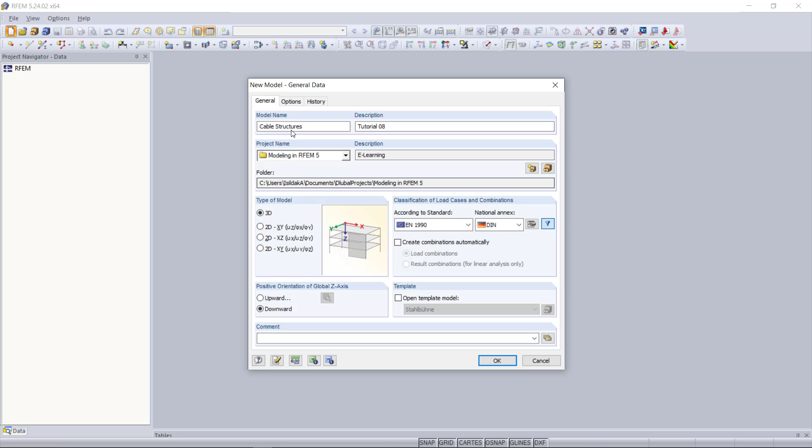So we can see here the dialog for the general data, and here we have to define a few more settings than usual. First, we will select instead of a 2D model, a 3D model. Then we have to activate RF-FORM-FINDING, which we can find under options, and then click on this checkbox here. Then we can close this dialog by clicking OK. Our example will be a mast with 4 cables. We will start with creating the mast.

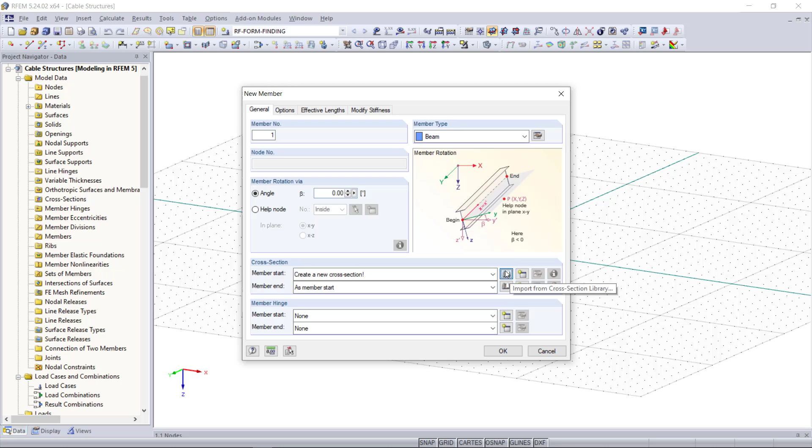For that, we will choose up here in the toolbar new member, and as cross-section we can set, let's say, a rolled cross-section, this one here. The material we can keep steel. Our mast will consist of 2 parts or 2 members. The first one will be 10 meters, and the second one will have a height of 8 meters, so in total we have a height of 18. For an easy way to create the member, we can change up here the work plane to the XZ plane. The first node of our first member will begin here in the origin, up to 10, then the second one with a length of 8 meters.

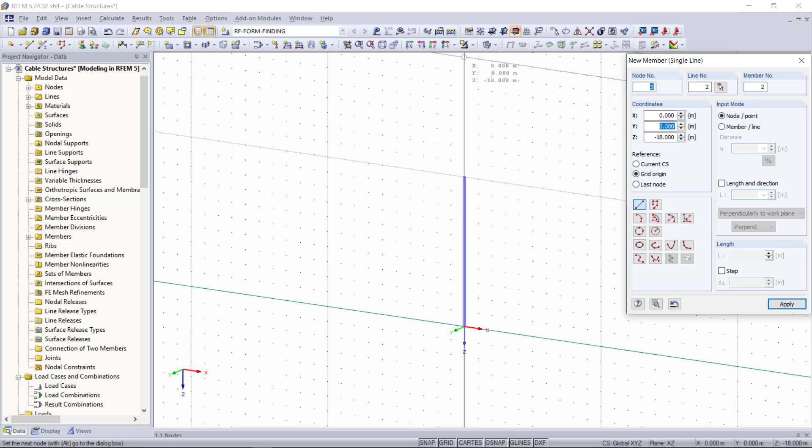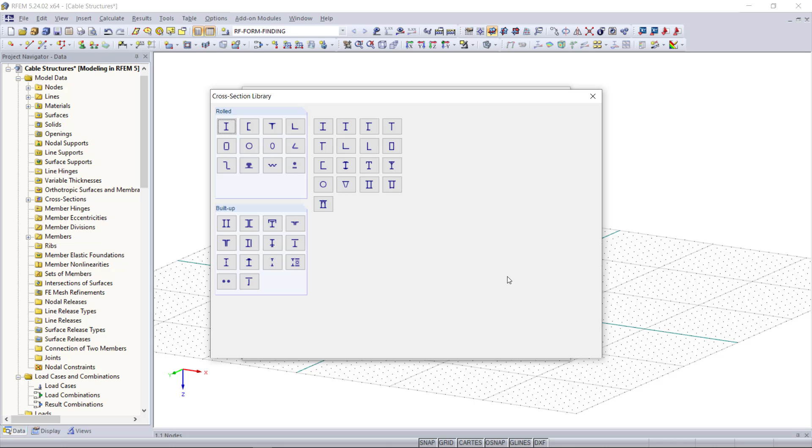Now we can switch back to the XY plane, and next we will create the cables. For that, we click here on new member again. And as mentioned in the beginning of this video, we will set the member type to a cable member. Then we can open up the cross-section library once again and choose a cross-section. We will choose a solid section, and under filters on the left side, we can choose a cross-section according to any standards. And we can also find, according to the cross-section type, cables. We will choose, for example, this one here, cable PE15. Now we can click OK through all of these dialogs.

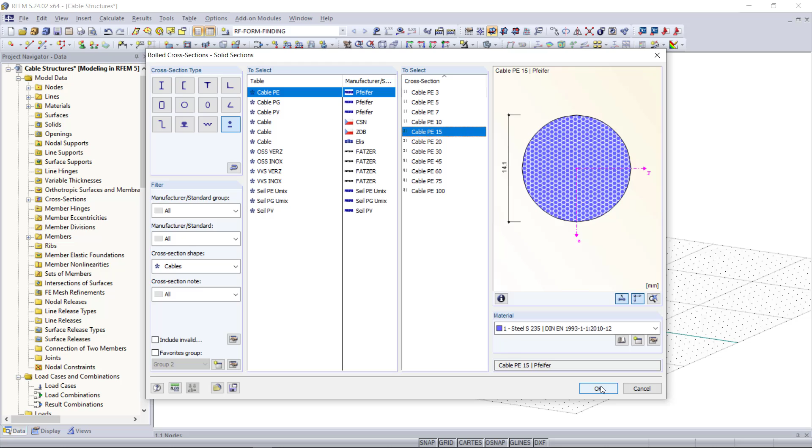We will place the first cable starting from the middle node down here to the point with the coordinates X 4.243, Y 4.243, and Z will be 0. We can quickly copy this cable 3 more times with the command up here called mirror. First around the XZ plane, and then these 2 around the YZ plane. Then we need also some supports, which will be hinged ones on each node.

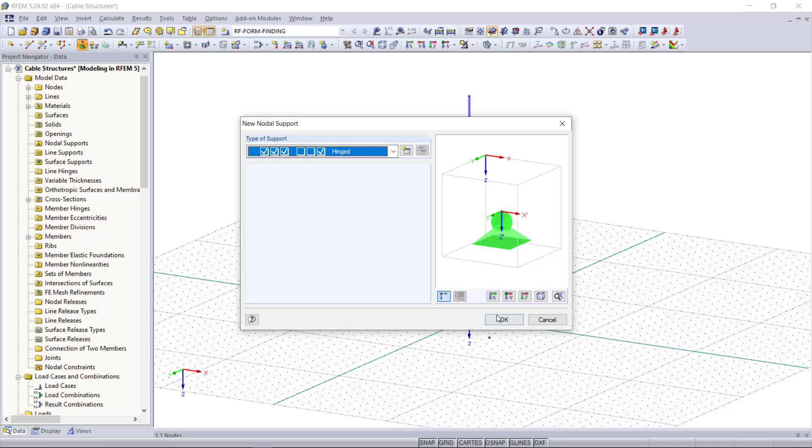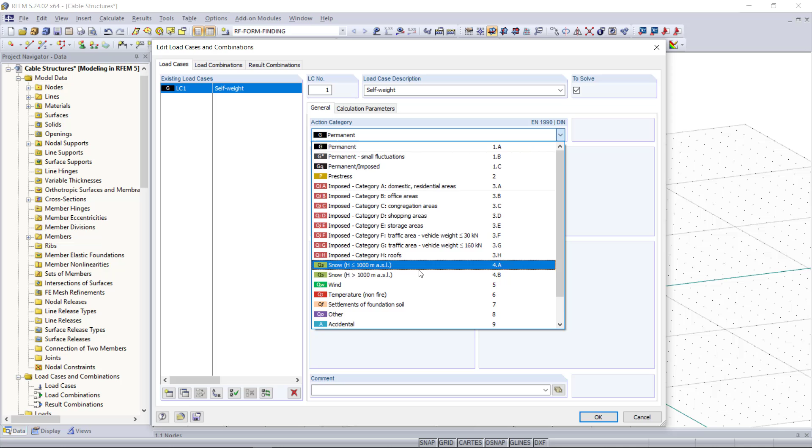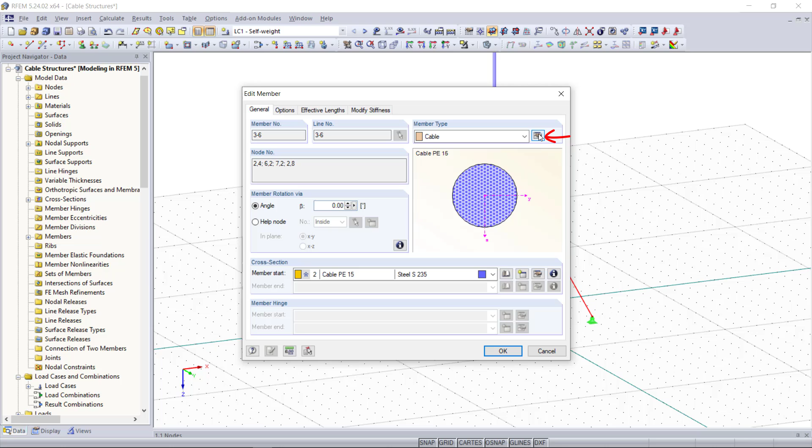Now that we have our structure, we can move on to the loads and load combinations. First, we will stay with one load case, which will be the self-weight. What's important here is to set as action category form finding, and activate the self-weight and enter it as Z1. Then we will select all 4 cables, and with double click we can open up the edit member dialog. Since we've already activated RF-FORM-FINDING in the general data, we can open up a new dialog by clicking on edit member type. Otherwise we wouldn't see this option here.

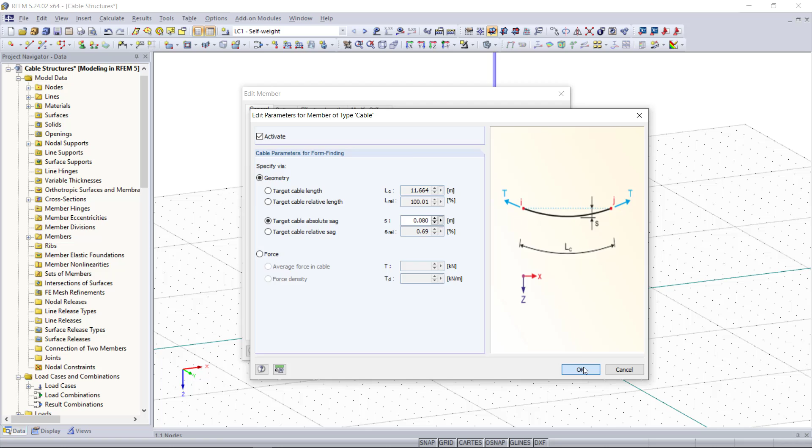And what can we define here? So we have the cable parameters for form finding. We can specify these via geometry or force. We can set a target cable length or a target cable absolute sag. For our example, we will define an absolute sag of 0.08, and the other parameters are filled in automatically, as we can see here. Next step will be defining the calculation parameters, which we can find under Calculate.

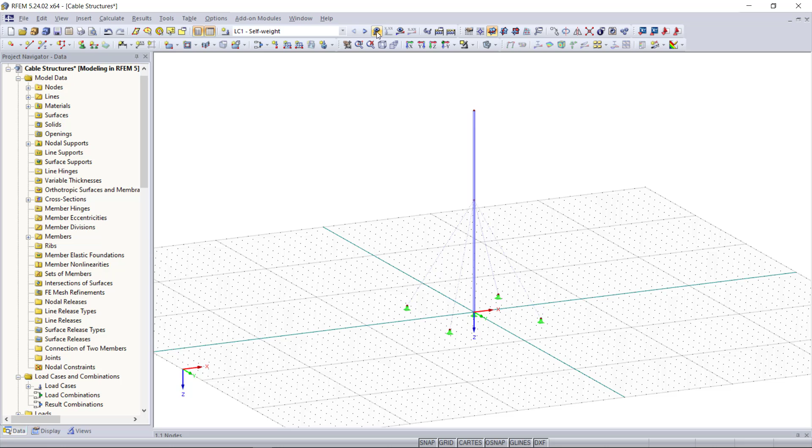And in this dialog, we have the tab Form Finding. Here we will set a maximum number of iterations, 50, and the speed of convergence will be 0.1 to get more precise results. And now that we have our load cases and also settings, we can run the calculation and then we can have a look at the deformation of the structure. As a second example, we will apply a wind load of 2 kilonewtons at the top and calculate the system again.

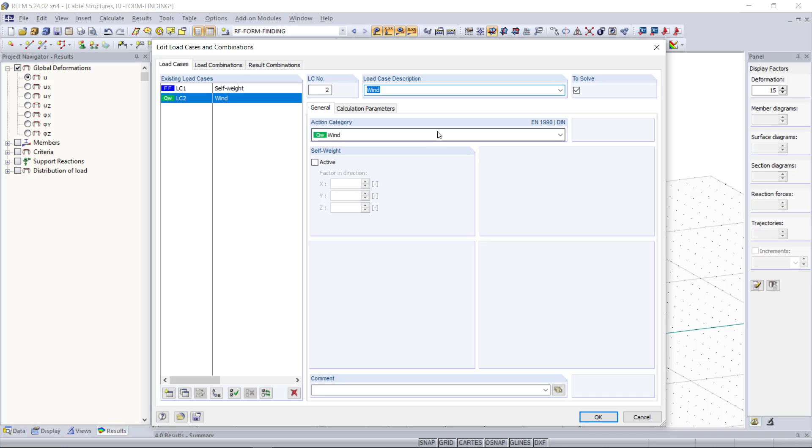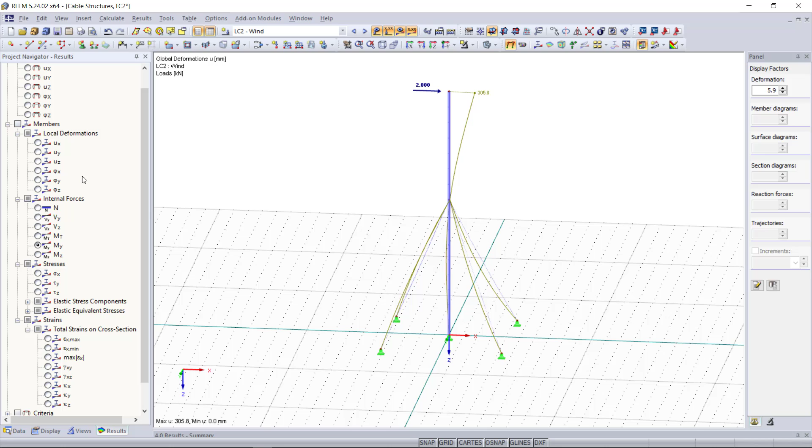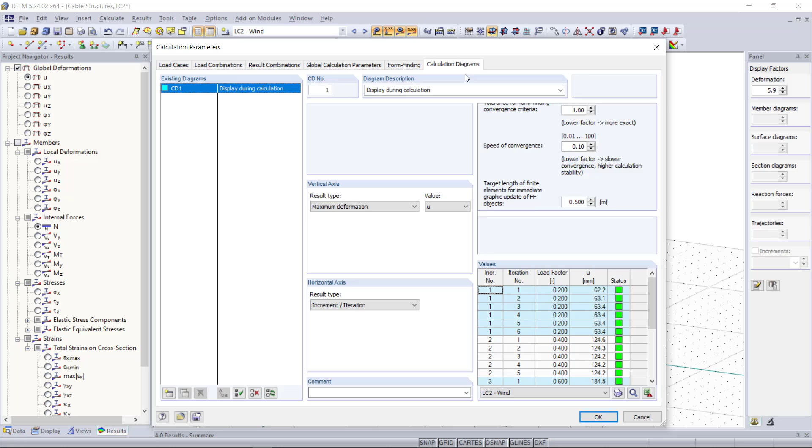What we can see with these results is while the 2 compressed cables do not absorb any load, the other 2 cables have a normal force like it should be. It's also interesting to have a look at the calculation diagrams. For this, we go back to the dialog of the calculation parameters. In the last step, we can have a look at the calculation diagrams. Here we can see why the calculation according to the theory of third order takes longer and how the calculation approaches the final results with each iteration step.